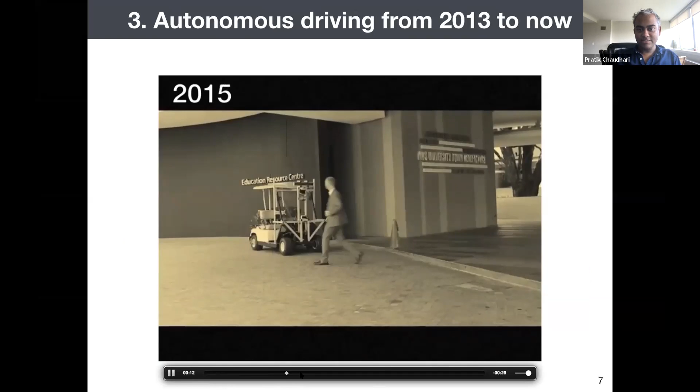The third part of our work is on autonomous driving, and this really began a long time ago, around 2012, 2013, where we were building very rudimentary autonomous cars, which kind of graduated towards full-scale citywide driving. Today, this is a large company called nuTonomy, and it can drive in Vegas quite well, and also Singapore and Boston.

Here is one fun problem that we solved recently in the area of driving. What we're interested in understanding is, let's say I give you one of these cars, let's call it the ego, it's you driving as an autonomous agent, and you're driving in an area with lots of other cars around you. What you would like to do is be aggressive, but not too aggressive, be docile, but not too docile. Essentially, manipulate the cars around you in order to make progress. This is something that human drivers do very well. We would like to build such qualities in autonomous agents.

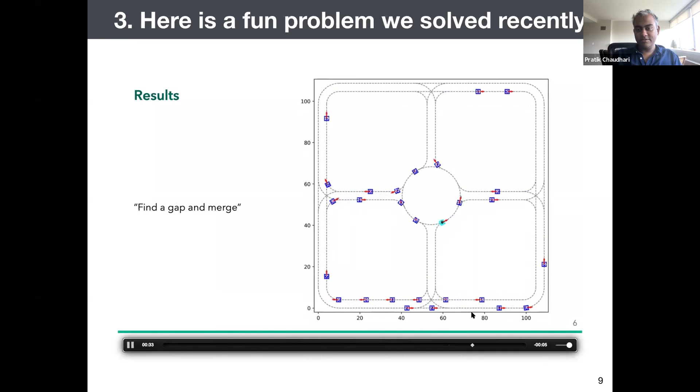And here is how it looks. Watch the cyan car. If there is a car incoming on the lane, it stops. Then if the other car stops, it takes the initiative at this point and goes into the traffic. At the same time, watch it again now. It is trying to merge into a roundabout, and it immediately grabs the initiative. So it's a little bit more aggressive than the other cars around it. That makes progress possible. We would like to study these kinds of strategies, which is what we've done in a recent paper.

So we think of intelligence not just as a machine learning algorithm that classifies your images lying on your hard disk, but we really think of intelligence as a robot with sensors and actuators, and learning lying in between, that helps it go around the world.

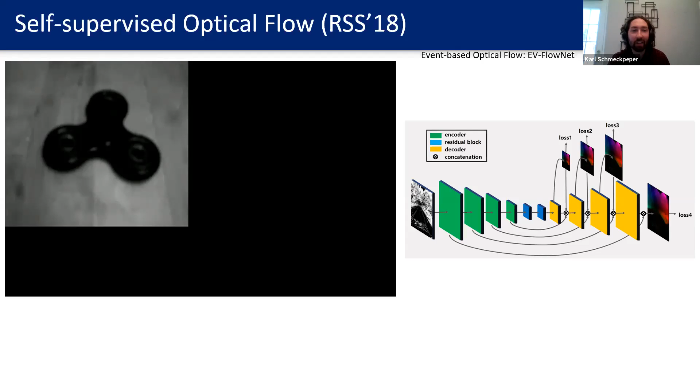We also do a lot of work with geometry. One of the main things we're looking at is equivariance and invariance. Convolutional networks work very nicely because if you translate an image 5 pixels to the side, they respond the same way. But if you rotate the image by 5, 10 degrees, whatever, suddenly the response of the network is completely different. So how do we make it so the networks can handle rotations and handle translations and handle all the different transformations that people can intuitively understand and are important for interacting with the world. We've done a lot of work with spherical harmonics and other geometry to make it so you can get representations that work well from various angles.

And this allows for pose estimation by having these equivariant embeddings, just by comparing the differences between two embeddings. Also, geometry allows us to do a good deal of stuff with pose estimation. Initially, we did this with a lot of objects, and that allows us to pick stuff up.

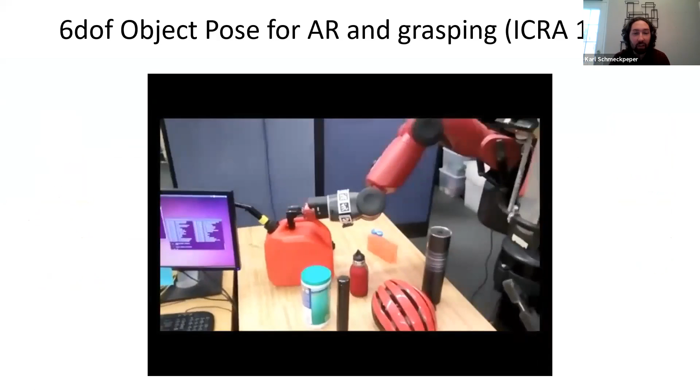We've since extended this to outdoor systems, more unstructured environments. We've also applied a lot of the work that came from doing objects to working with people, which is much more complicated as people are deformable and have different shapes. So we do a lot of work with human pose tracking, human shape estimation, and applying many of the same lessons we learned about geometry to these tasks.

And we're looking at multiple humans. I definitely don't have time for this video, but we can estimate positions of multiple people using deep learning and all sorts of other stuff.

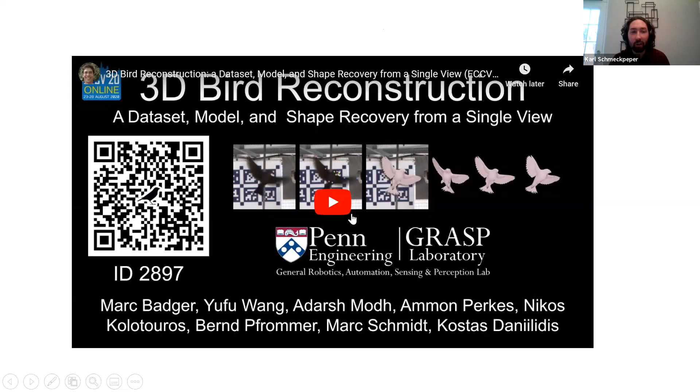Another project we have relating to this is doing the same things with birds. We have a collaboration with a bunch of people in biology where we're tracking a large number of birds and doing pose shape estimation to try to learn about their social behavior.

Next we get into our studies of actions. For a lot of predictive models, reinforcement learning, we're interested in building up good understandings of the world. But how exactly you gather the information for that is non-trivial. So we do a lot of work with figuring out what is a good exploration policy, how do you make it so a robot can actually be curious and go out and explore the world, try things it doesn't know about, and improve its understanding of the world, so it can learn quickly and efficiently in task-agnostic ways, so it can learn to do a lot of stuff.

We also do work with learning without actions. So if you have a large amount of, say, video, and you want an agent to be able to do behaviors in the video or learn useful information from the video, we have work with taking videos of humans doing various actions, sweeping, moving objects around, and making it so robots can learn about the environment or how to see things or how to complete those actions by looking at videos of humans, despite the human videos not having actions, having a lot of domain shift, and basically enabling reinforcement learning, video prediction, and that kind of stuff.

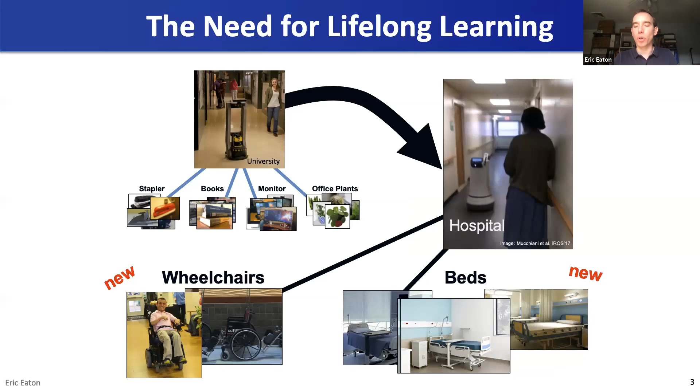Now transfer learning enables the robot to build upon its previous knowledge. But what happens if we extend this out to even more objects? Or what if we take the robot and move it to another setting, like a hospital, where now it encounters things like wheelchairs and beds and other objects it has not encountered before? And then we move it to another environment, like a museum, and then another and another. The idea is that lifelong learning enables the agent to just continually build upon its knowledge over time.

So the goal of the work in my group is to develop intelligent systems that can first off quickly learn new tasks by building upon their previous experience. As they experience the world, continually improve their models. We're not interested in robots that just learn one thing and do it well. We're interested in robots that learn a whole variety of different tasks and do all of them well. And just like you or I, we contend that robots can do this with interaction with other agents as well as humans by, for example, learning from demonstration.

And all of this is built around this idea of lifelong learning, where we have an agent deployed for an extended period of time in the world. So we built a whole family of lifelong learning algorithms around this idea. It started back in 2013 with our first algorithm called ELLA, which worked on classification and regression, and we've since extended it out in many different ways.

We've looked at curriculum selection, where you give the agent some control over its environment. We looked at reinforcement learning in lifelong learning settings. We also looked at how do you learn by imitation from humans, where you have a large variety of things that you need to learn from demonstration over time. We looked at how to do autonomous cross-domain transfer, how to do zero-shot learning, giving a description of the task or environment you're trying to solve, how to do this in distributed settings with cooperative lifelong learning, and also in deep learning settings.

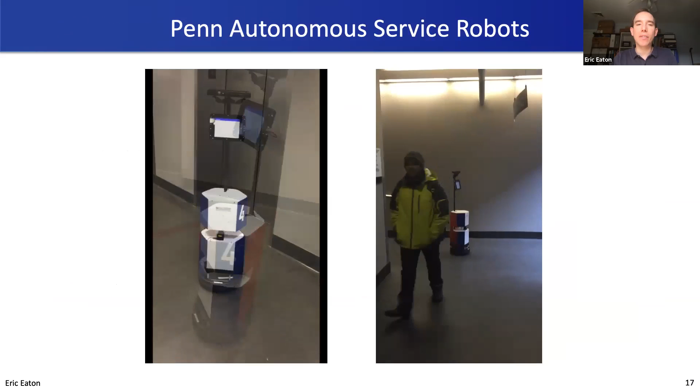Here's a quick example of some videos on autonomous service robots. You can see more if you go to my website, but these are robots we have, which when we're available, allowed to go around the building, we have them running around the building, and we can run experiments in practice.

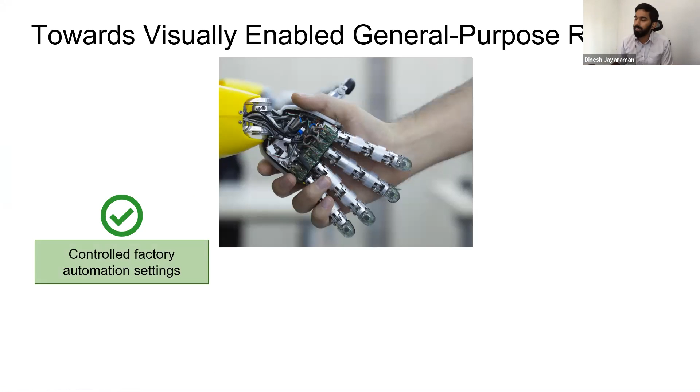All right. Hello, everyone. I'm Dinesh, and I lead the Perception Action Learning Research Group here at GRASP. Like a lot of us, we are interested in building general purpose, autonomous, versatile robots. But if we take stock of where robotics is at today, we notice that a lot of the successes in real world applications have come primarily in controlled factory automation settings. And we've had relatively limited success in delivering on the promise of robots being helpful assistants in our homes, offices, and more broadly in our everyday lives, right?

And so if you look at the differences between these two settings, one thing that stands out is that on the left, you typically have fully observed settings with fully modeled dynamics, whereas on the right, you typically have many more unknowns and uncertainties.

I believe that what's necessary to make the transition from the left to the right is perception, because perception entails extracting information and therefore resolving uncertainty. A lot of the work we do in our group is built on the idea that high bandwidth perception, which delivers a lot of information per unit time, such as through vision, is key to solving many of the remaining big problems in robotics.

So we treat action in our research as both a means to perception and an end for perception. That's a useful organizing principle for many of the projects in our group. I'll talk about a couple of these to highlight two broad umbrellas: one under the perception-helping-action arrow, and the other under the action-helping-perception arrow.

For perception helping action, the thing I'll highlight today is visual dynamics models, where we try to model the evolution of the visual state of a system. Because this is such a difficult problem, since you're operating in high dimensional spaces, the angle we've taken is to build some kind of abstraction that reduces this problem to be more tractable and to help deal with problems like accumulating errors over time.

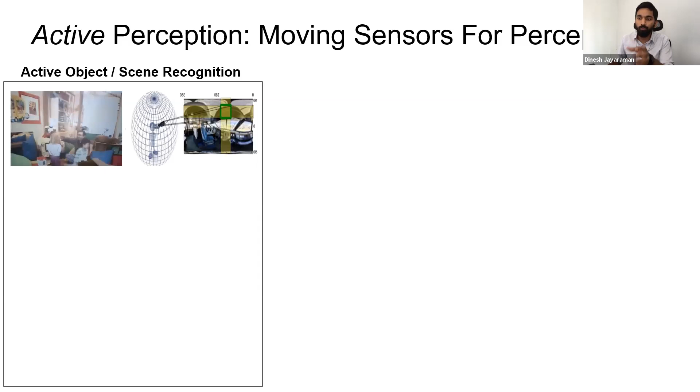Here is an example of object or scene recognition with active perception, wherein the idea is that you can move your robot, or manipulate an object, for example, to get to a more informative view.

We've done this both for object recognition, where over the course of manipulation, you're able to get from a poorly lit oblique view of an object to a better lit, more frontal view, and then recognize its category better.

We've done similar things in the scene recognition setting, where the agent scans its camera around a virtual scene and then identifies which category that scene belongs to.

We've used similar principles in the tactile manipulation setting, where the tactile sensors are actively moved around an object to identify which points of contact correspond to stable grasps. Once you've identified a good stable grasp, that's when you lift it off.

I'll let that video play in the background and move to another application where we've done similar things, which is reconstruction. We can train policies through the objective of reconstruction that sample important views in the scene that matter for reconstructing the entire scene.

We've shown that those same policies, trained with this unsupervised reconstruction objective, can transfer to a number of downstream tasks. There's also a fun application of that. I'll move on to my final slide now.

Generally, the organizing principle for many of these projects is that perception can aid action, and action in turn can aid perception. These are a number of other projects that I haven't mentioned.

Here's a snapshot from a couple of months ago of some of the students working in our lab.

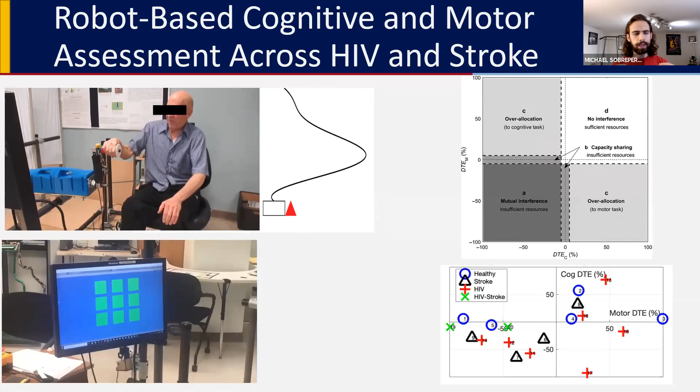He's doing this within the context of looking at the interplay between HIV and stroke. We know HIV is a predictor of stroke—if you have HIV, you're much more likely to have a stroke at a young age. So he's trying to understand how you deliver therapy to those communities and handle that challenge.

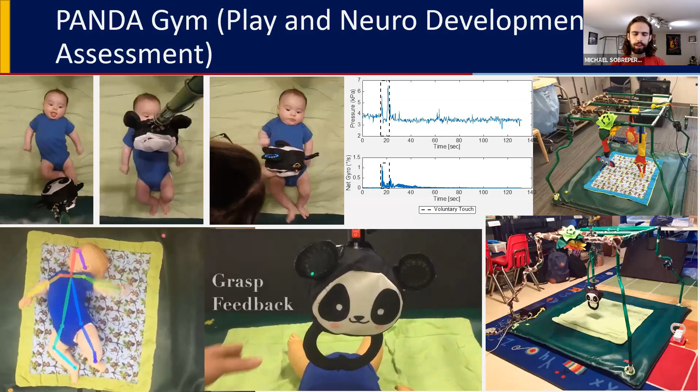Another project we're working on is the Panda Gym, which is trying to deliver assessment tools to children at a very young age. If a child has any sort of delay in their development, if you can find that early on, you can deliver therapy at a young age. And because of the neuroplasticity present in young children, you can start to deliver really positive outcomes long term. The thing is that there are a few assessments for young children, but they're really expensive. They require really expert clinicians to be able to perform, and so they're not really accessible, and as a result, they're not as broadly used as one might like.

So could you instead present children with some stimulus in the form of this toy that has various sensors, can make noise, can light up, or perhaps just observe them directly using the same pose tracking that everybody else uses, use pressure mats, etc., to try to get at what are the things that can tell you that a child is developing in an abnormal way.

And so this project is actually scaling up rapidly. We've tested around 30 subjects so far, but now we're about to test like 1,500 subjects in ICUs, and another 150 in a newer version of this gym. And that's being done underneath an R01 that Dr. Johnson won with some other collaborators at Penn.

The project that I work on is the Flo and Lil' Flo robots. The idea here is that we're all doing this telepresence thing right now, and although it works for this sort of thing, it doesn't really work that well for rehab, because the ability to motivate people over this, the ability to communicate with them over this is somewhat limited. And then looking across it, my ability to assess anybody else's motor function over this is somewhat limited as well.

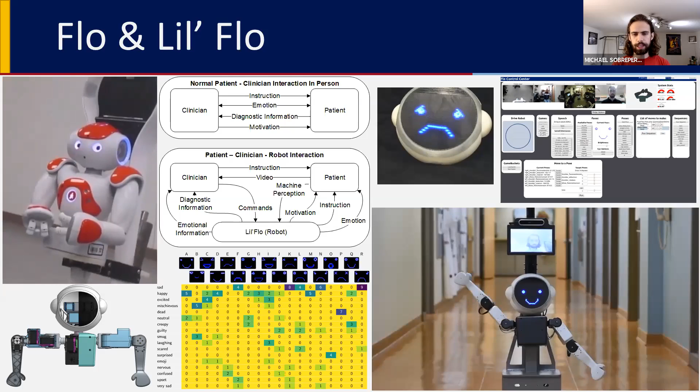So what if we were to take social robots, put them onto these mobile telepresence platforms that are already used, and use that social robot as a way to engage patients. So play games with them, demonstrate activities to them, help to build that motivation, build that understanding, and then use computer vision and machine learning and all that sort of stuff to come back and do an objective assessment of what the patient's function is. We're in the process of doing both feasibility testing on this and testing the effect of that social robot.

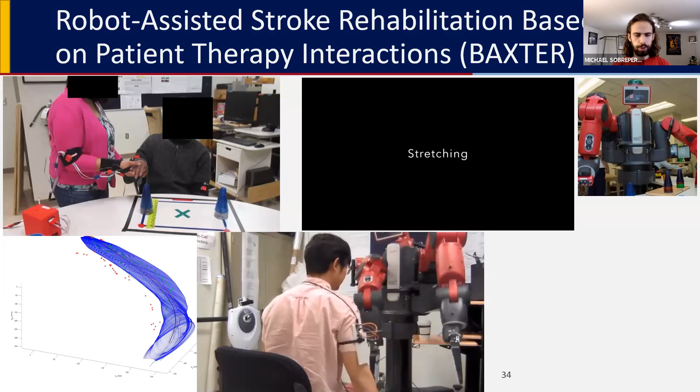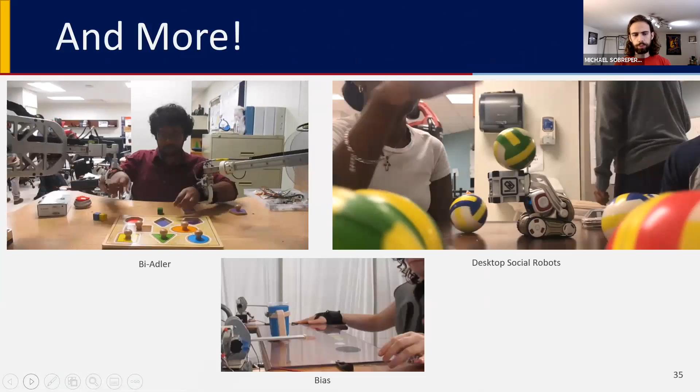We've also done some hands-on work where we've got robots actually manipulating people as they move to try to push them towards more ideal motion parameters. This was done using a Baxter. And then a number of other projects looking at how we can do bimanual rehab, how we can do really high speed kinematic tracking of arms to do assessment, etc.

So here's some contacts. If you want to reach out, I'd be happy to talk to you, as with the other members of the lab. Thanks.

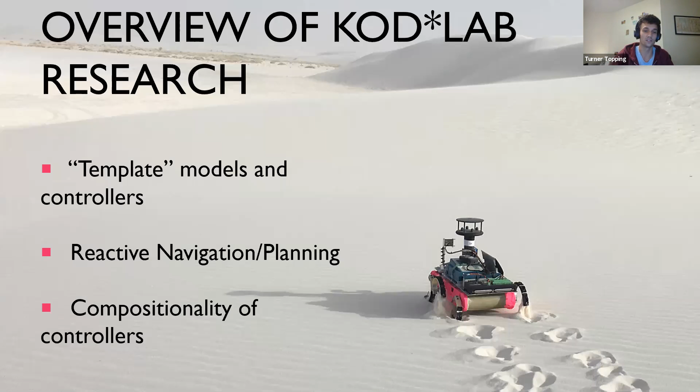So what do we do in Dan's lab, in Kod Lab? We focus on a lot of different areas of research, but I'm going to talk about three main thrusts here today. The first one is template models and their controllers. The second is this idea of reactive navigation, reactive planning. And then this last one is going to be the compositionality of controllers primarily.

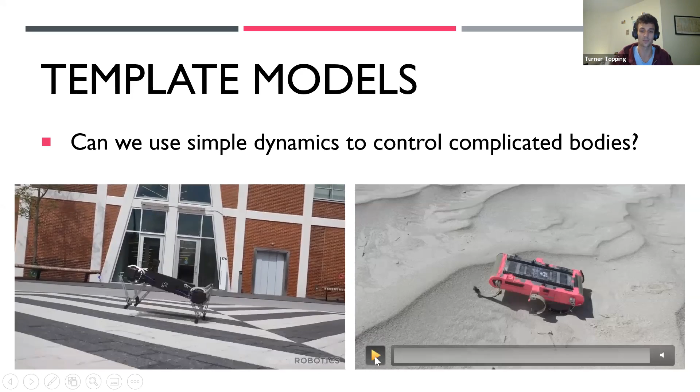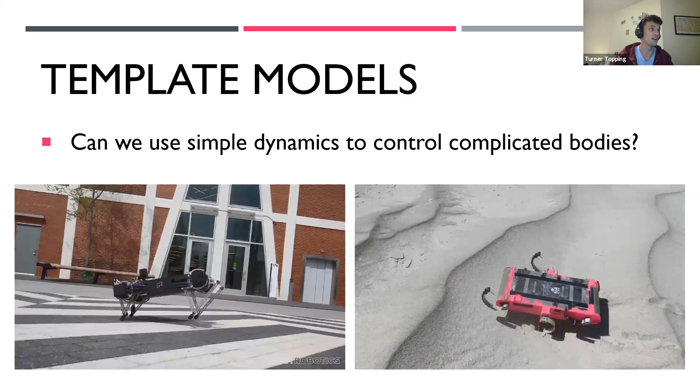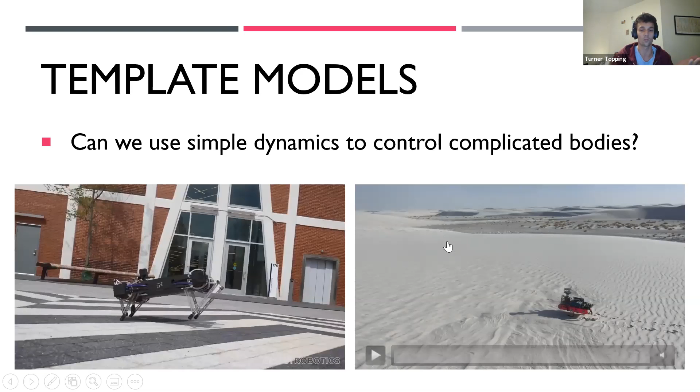So what are template models? If you remember from your ODE classes what a spring mass damper system is, we basically like to think about complicated systems as behaving like simple systems. Here are two robots: the one on the left is Minotaur, the one on the right is RHex, and they look very different morphologically, but they both are operating under the same principle, where their legs are pretending to be these spring mass damper systems. Because of that, we can transfer what we learn about one system and how it behaves, and how to write behaviors for it, from one to the other within our ability to anchor these systems to those spring mass damper kinds of things.

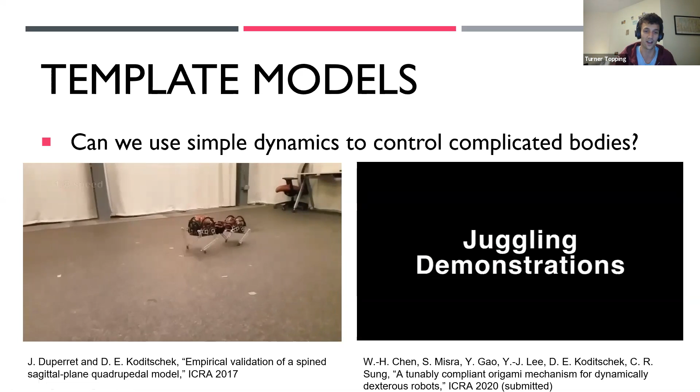And as the systems get more complex, we can do the same kind of thing. So here's a student, Jeff—he's graduated now—his robot Inu, which now has a spine that's flexible, and it's actually being driven actively to lengthen the stride and generate more energy to run faster and jump higher.

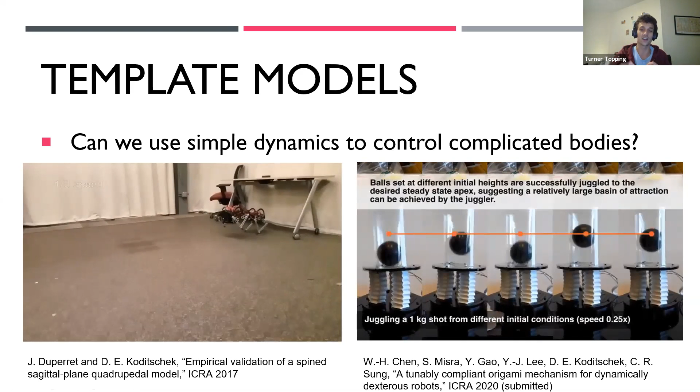Here's some work by student Wei-Hsi Chen, experimenting with these origami structures. They have a very high degree of freedom, so they're very hard to control in general. Instead, we're trying to anchor them down to these simple one-dimensional degree of freedom systems. He's able to juggle this 1 kilogram shot to different heights with this very high degree of freedom system.

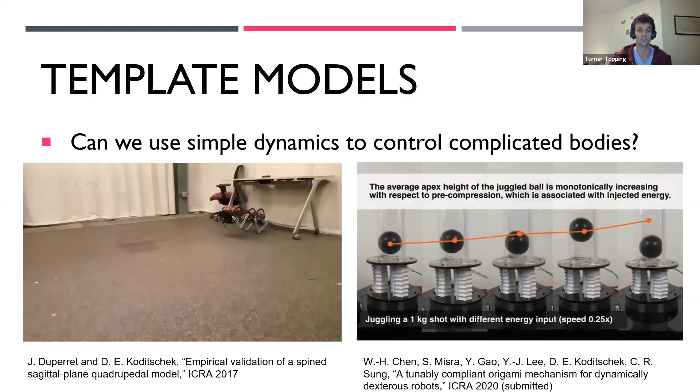We also like to model our environment. One of our students, Sonia Roberts, is working on how to model sand. Sand is notoriously hard for legged robots to navigate because it's so inconsistent and has this strange behavior, making it a very complex interaction. Sonia is trying to come up with a model for sand that looks something like the spring mass damper system we know so much about. When we think about the robot's leg interacting with the environment, we can think about that as the phasing or interaction of these two controllers.

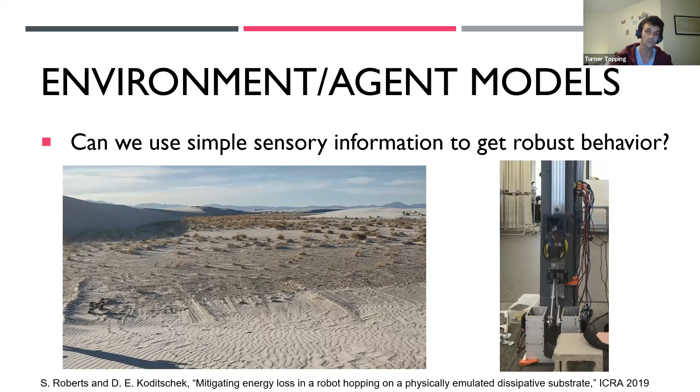Another thing we like to think about is navigation. You've seen a lot of different strategies for navigating the environment. Typically what we do is get an assessment of everything around us, decide what we'd like to do, and then solve it in some sort of AI or machine learning way. If something unexpected comes up, we stop and plan again. But sometimes that's computationally expensive, so wouldn't it be better if we could react to things on the fly?

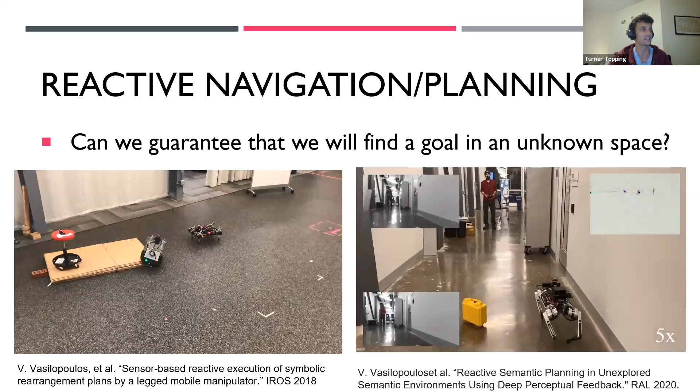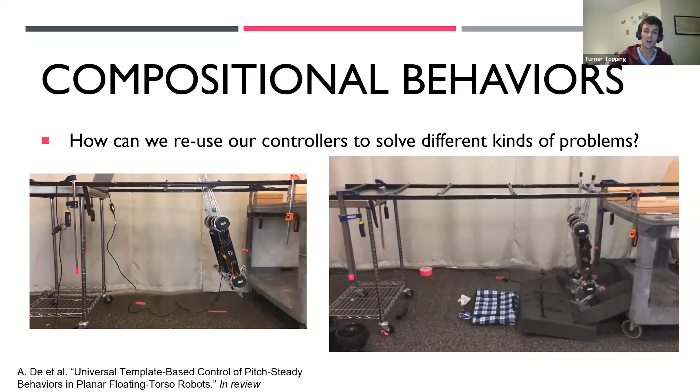You can reuse these template behaviors we talked about at the beginning, and if you're able to parameterize them, you can understand how one segment will end and where the next needs to begin. If you can talk about the guarantees, the conditions under which one piece needs to start and under what conditions it will end, you can talk about stringing these things together in something called sequential composition, which is not a new concept at all, but we're trying to expand it into these more dynamic regimes. So, in the hopes of keeping things quick, that's basically all I have to say.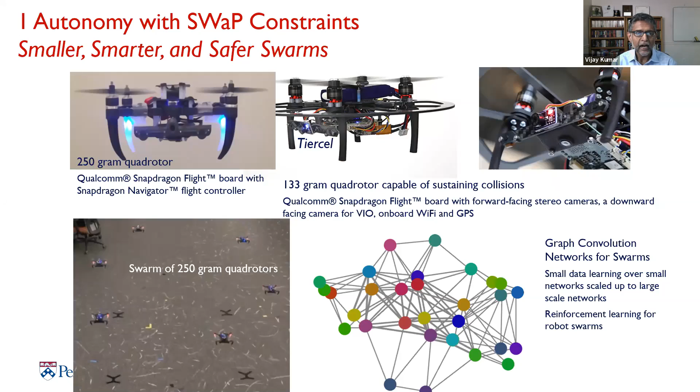Recently, there's been a big project awarded to the school led by my colleague, Cherie Kagan, which is really about bringing these technologies to precision agriculture, where the idea is that our robots can act as our eyes and ears and noses, essentially sniffing out information about plants and trees, and be able to customize the kinds of things you might do on a farm to the specific plant - water the plant, fertilize the plant, apply insecticides, and so on.

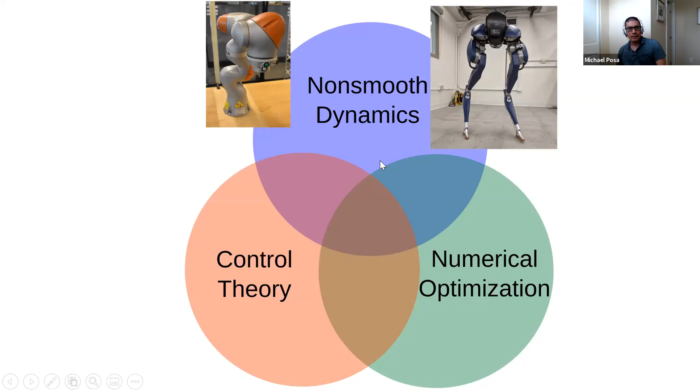So I'll give a couple of current projects going on in the lab. One thing we've been thinking about lately - this is Yu Ming's work in our group - is the role of simple models for planning and control, in this case for locomotion. A pretty common technique that many people use is to essentially control their very complicated robot by making it act like a very simple thing. In this case, you might take your 30-degree-of-freedom walking robot and say, really just make this act like a pendulum, make it act like a point mass.

And by doing so, you can gain the ability to act in real time, to make high-speed decisions, and ultimately some really beautiful physical insight has gone into these realizations that, at the end of the day, these complicated systems do look a lot like pendulums, or do look a lot like point masses.

The question we've been asking, though, is once you do that, once you make this reduction, you've given away a lot of your control authority, you've given away a lot of your ability to perform more complex behaviors. So how do we start adding in that complexity back into the system? How do we start adding piecemeal in degrees of freedom to the system? And can we do so in a way that maximizes our potential moving forward?

So this is, again, Yu Ming's work, looking at formulating an optimization problem where you're explicitly trying to find a simple representation of legged locomotion that you can use for real-time control and planning, but is more capable than, say, a simple point mass might be.

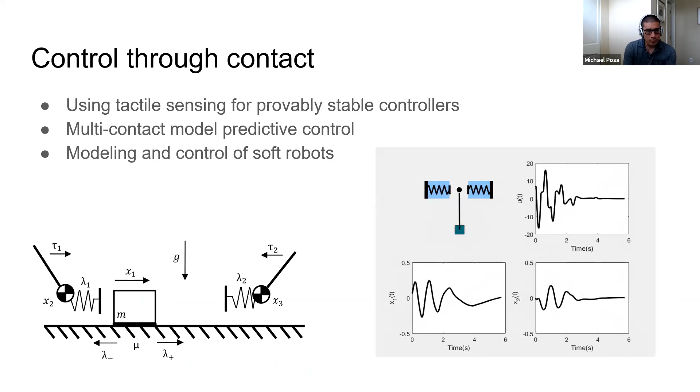Another recent project I'll mention is control through contact. This is work by Alp Aydinoglu in our group. We're interested in designing control policies that are going to be robust in settings where the robot must make and break contact with the environment.

One particular thing we'd like to leverage here is the role of tactile sensing. For cases where you may not be able to observe the object you're trying to manipulate, but you do have tactile sensing available, can you still design control policies that are robust or stable?

Alp was using bilinear matrix inequalities to generate provably stable control policies for these multi-contact systems. We're hoping to take this into the future with a joint project with Marc Miskin and James Pikul, as well as others outside of Penn, for a soft robotics project, extending these techniques for control through contact into the challenging domain of very high-dimensional soft robots. And with that, I'll wrap up and show a picture of our lab.

This is our lab group over the summer. Everyone very, very far away and remote, but we still had a good time this summer.

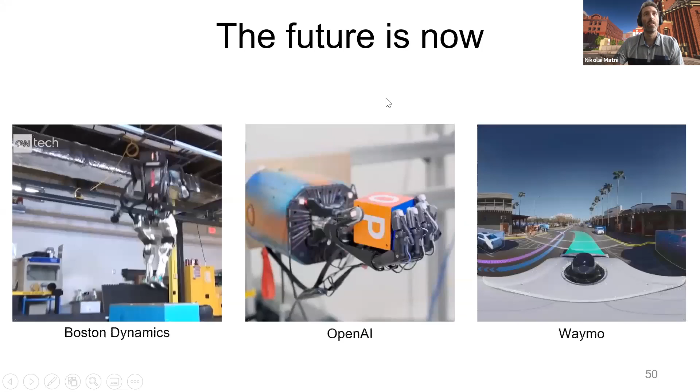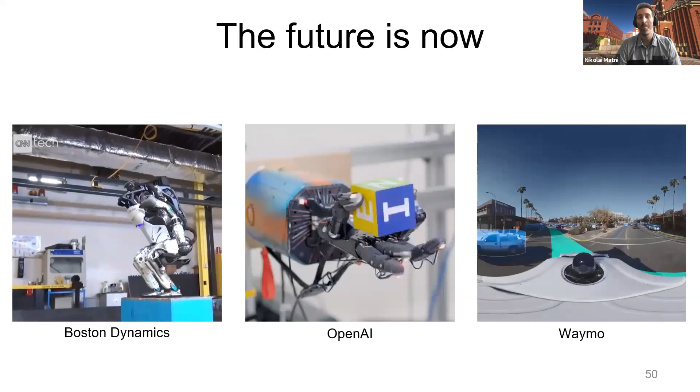If you watch some of these videos online today, you might be tempted to say something a little corny, like the future is now, and things like robotics and AI are solved. These are all very impressive, but if you dig a little deeper, you see pretty quickly there's still a lot of work left to do, especially when it comes to endowing these systems with guarantees of robustness and safety. That's broadly what my research is about, trying to get learning-enabled systems to reliably not fall over or crash into people.

Our group's broad approach to achieving this is to combine tools from dynamics and control, and the guarantees of robustness, stability, and reliability they typically provide, with the benefits of machine learning and big data, such as high performance, adaptability, and optimality. Our hypothesis is that it's at their intersection that all of our nerdy hopes and dreams are going to come true. So our work broadly works on problems at the intersection of these two fields, ranging from core theory and applied problems and everything in between.

What I like to spend the rest of my time doing is highlighting how we've applied this philosophy to one particular problem area, namely understanding perception-based control and how the interaction of machine learning and control manifests itself in this area. We do work on a whole bunch of other stuff in our group, and I'll have some pointers to other papers on the last slide, but I recommend you check out our website for more information.

In this broad space, one of the directions we're looking at is asking what kind of guarantees, if any, we can provide for control systems that get information about the world using cameras or sensors.

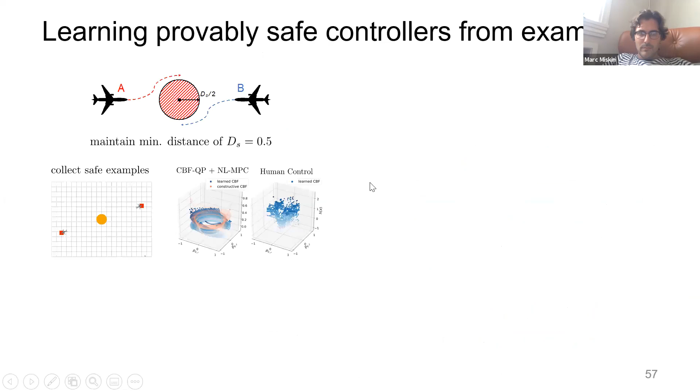Oh sorry, those were backup slides that weren't supposed to make it. Yeah, I was like, I can't talk about that. I don't know what that is.

The way we build them, our lab breaks down into 3 main buckets. Part of what we do is build components for robots sub 1 millimeter in size—lots of nanofabrication and developing new nanotechnologies, building small sensors, computers, and actuators. The second is putting those components together to make individual robots, which requires thinking carefully about classic robot problems in new ways at this ultra tiny length scale—how robots should locomote, how they should work together, and applications. The third is swarms of these things: once you have robots, you can make millions of them. How do they interact to do useful things? Can we make materials out of them? Can we have them interact with biological systems? So we look at these as collectives and the emergent behaviors that come out of them.

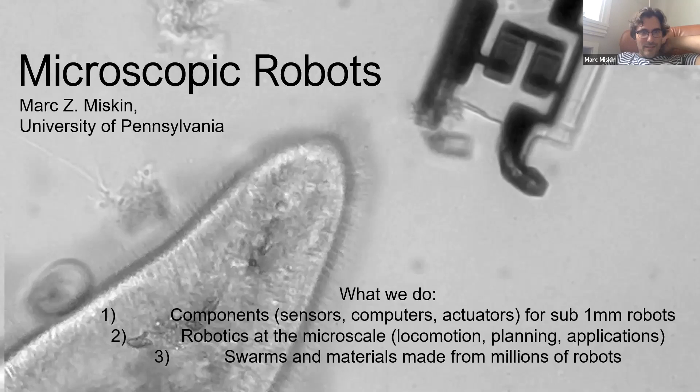So let me show you some... I should be able to advance the slides. Okay cool, so let me show you one of these little guys in action.

This is our very simple robot, but it gives you a gist of what we do. The robot breaks down into 2 main parts: it has a body, and inside the body are standard silicon microelectronics, connected to electronically controllable actuators that form its arms and legs. This robot has a really simple design, just a series of solar cells on it, and by shooting laser light into the solar cells we can trigger the actuators to move. You can see this little laser dot hopping back and forth—that's me firing laser light to drive the actuators—and off goes this robot marching around the microscopic world. One cool thing about this movie is if you look around the robot you can see little dust jiggling around—that's Brownian motion.

So this robot is so small that if you made it just a factor of 10 to 100 times smaller, it would begin to diffuse around due to collisions from the water molecules surrounding it. So again, it just gives you a sense of how small this little tiny device is.

Now, one of the cool things about this robot, besides the fact that it's really tiny, is that we make these things using essentially the toolkit developed by the microelectronics industry. And one of the consequences of doing that is that we can build these devices massively at scale.

So this is a movie showing the last stages of our fabrication process. What we're doing is etching out the substrate, the foundation underneath the robots, to release them into their final geometry. This movie is real time, so this is actually the time scale at which this takes place. You can see that once that surface underneath the robots dissolves, they fold up into their final target structures.

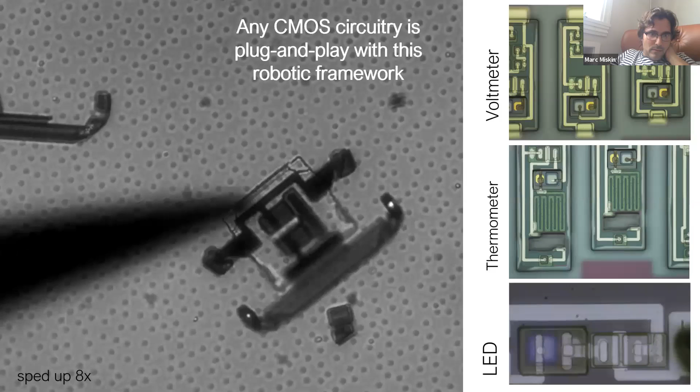So what are we doing now? Well, this is a pretty dumb robot. It doesn't have any real sensors, any real intelligence. In some ways, you could argue it's not really a robot at all.

But what's neat about this little proof of concept device is that all of the systems it uses for powering and locomoting are plug and play with standard silicon microelectronic circuitry. And so what my group is up to now is developing little widgets that you would want to do robotics at this length scale.

So we're building little voltmeters, say, that we can put on this robot so it can sense things in the fluid around it. We're building little thermometers so it can detect temperature gradients or follow them. We're putting little LEDs on the robot so they can blink back to us data about what they learn about the world around them, and we can blink instructions and data back to them by shooting it through optical pulses and light. So this is kind of the vision.

There's a fair amount of technology that we can steal from the microelectronics industry. And we're now in a position to start basically putting legs on those and turning them into systems that move, that actuate, that sense, that do stuff.

So that's the story for our lab. I just wanted to take the last couple seconds to, one, show you one more cool movie of one of these robots running around, and two, tell you about specific projects of what we're actually working on.

So the three big things we're playing with in my lab currently are: first, we have a project about building smart micro-robots, building systems where these devices are actually programmable, where you can write instructions to them and they'll carry out an onboard program. This builds a lot on borrowing technologies from the semiconductor industry.

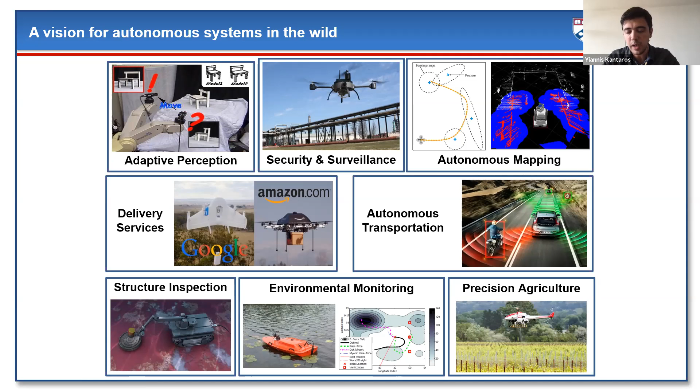Some of the research problems that we're working on in our group range from designing safe autonomous architectures, planning and controlling in unknown environments for robotic systems, to integrating vision, perception, and in general machine learning into the feedback control loop, as well as making learning more robust and verifiable.

There is a deep learning component, and you can think of it as the perception system, the vision system, that interacts with the real world by taking images and then processing them and then generating some classification results, some semantic information about the environment that our system operates in.

And the main question here that we address in our group is to understand how we can compose those three components in a safe, robust, and verifiable way without making the assumption that each one of those components is perfect.

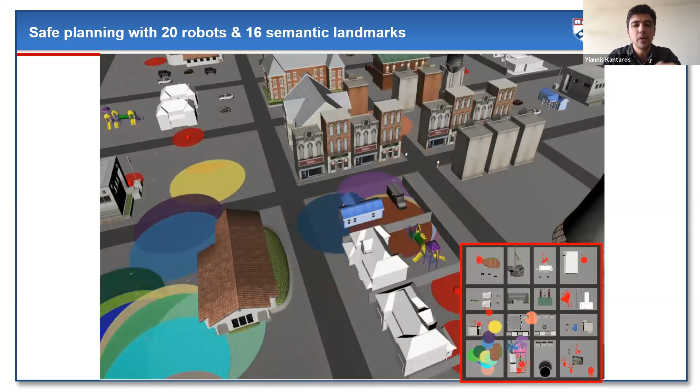We have also released a tool recently, which will be available for download soon, which is now connected to Gazebo and ROS. This is, for example, a simulation video that shows how this whole control loop may work in the real world. What you see here is a team of drones, UAVs, that are flying over an unknown city in order to provide services to semantic targets while avoiding flying over certain residential areas.

And with that, I will conclude the talk, and I will just say that this is a joint work of several talented students and postdocs in our group. If you have any questions, please feel free to reach out to us.

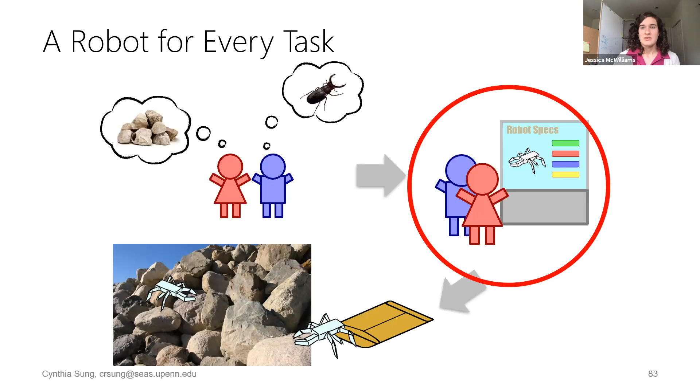Once they are satisfied with the performance of it, then they can get a bag of parts and get... sorry, I'm having some trouble with the slides, but they can get their parts kit and build it.

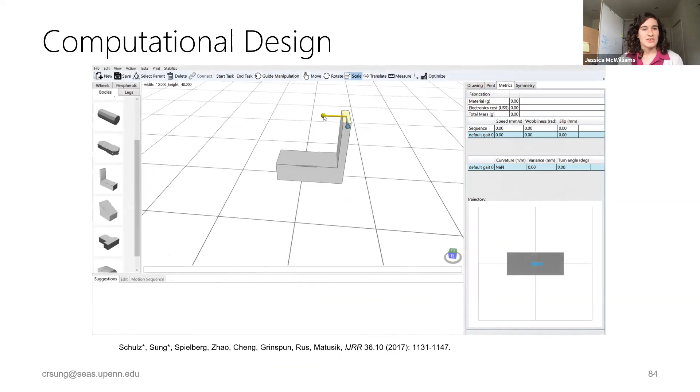So one example of this software is one that Cynthia developed previously called Interactive Robogami. It has in the center a design space where you can drag and drop parts. And then on the left, you have a panel that operates like a construction kit, where you can actually add parts to the robot. You can also add functional parts and customize them to your liking.

The system also gives you gaits where you can operate with motion plans, and it provides metrics and feedback on the gaits so that you know how your robot will perform in real life.

Yeah, so it also outputs a full fabrication plan, giving you STL files that you can 3D print in a matter of hours, as well as electronics, parts that you need, and connections for those parts. So with just a few hand tools and a little bit of extra time, you can easily assemble your robot and have it walking in front of you.

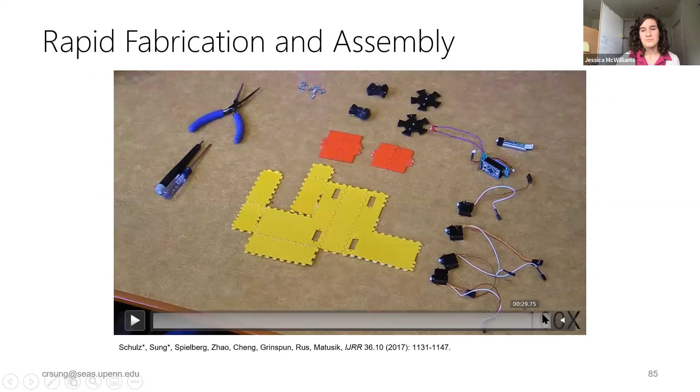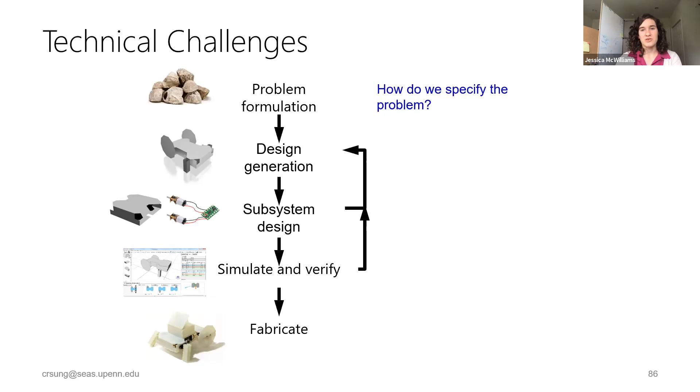We break the design process down into several subsections, and these comprise the technical challenges of our lab. The first one is problem formulation: we need to figure out how we can specify the problem. Next is design generation: what design options should we present the user? Then we go into subsystem design: what subsystems need to be specified, and what are the interdependencies between the subsystems? From there, there's the option to loop back to the design generation phase, as we know that as subsystems interact, sometimes that might make the design infeasible.

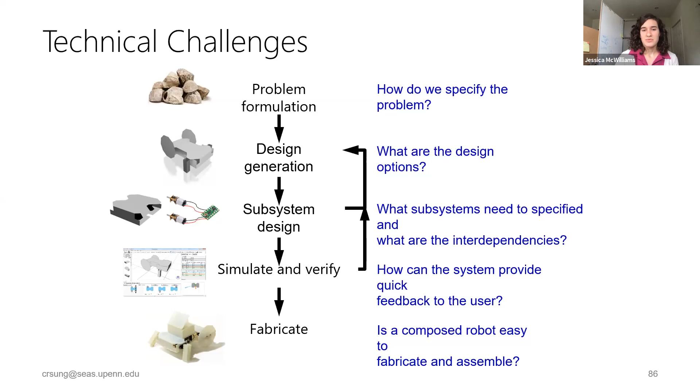Next, we can move to simulation and verification and determine how the system can provide quick feedback for the user. And then finally, fabrication: we can determine whether the robot is easy to fabricate and assemble. We want the user to be able to receive feedback from the system so that they can decide how many times they want to go back to design generation before they decide that they are satisfied with the design and can fabricate.

Next, some projects in our lab. Just to give a brief overview really quickly, we look at foldable robots. These can be made of paper or mylar and can give us a variety of motions.

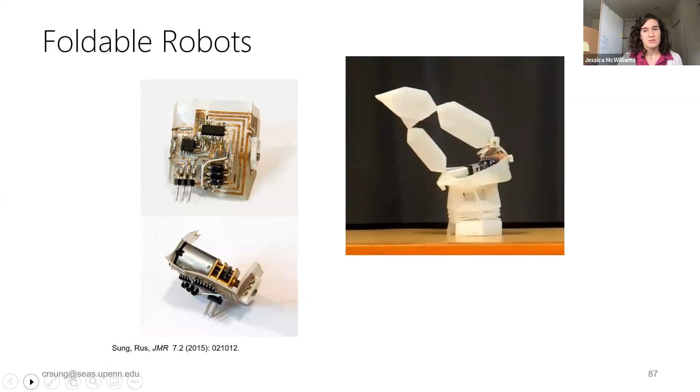We also develop origami mechanics models. We can treat the folds in the origami as springs. And from there, we can determine how the model will behave when you pull different tendons and apply forces at different points on a layer.

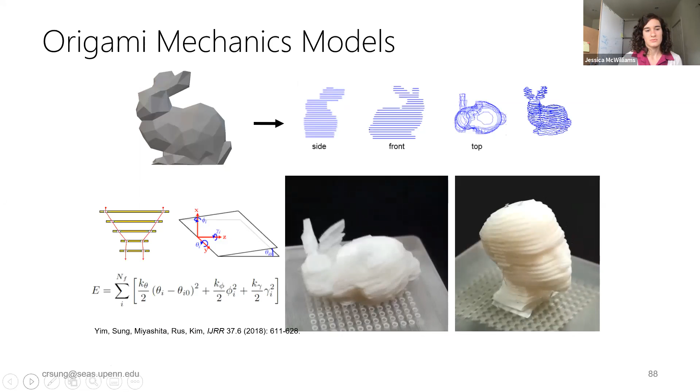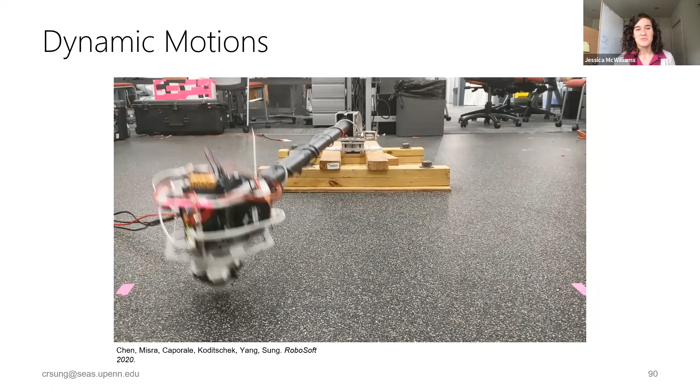Another example of dynamic motions - if you caught Turner's presentation, you're probably thinking this looks pretty similar because it's also in collaboration with Koditschek, and it's basically the juggling robot but turned upside down to exhibit hopping.

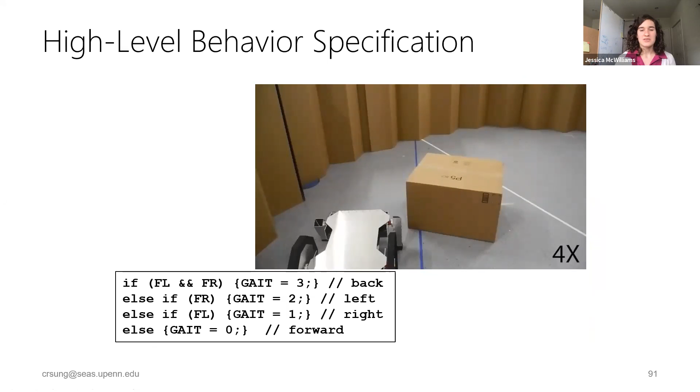We also think about how we can use the gaits that are output by software such as Robogami and put high-level behavior specifications on top of them, allowing users to take the gaits they already have and intuitively design behavior.

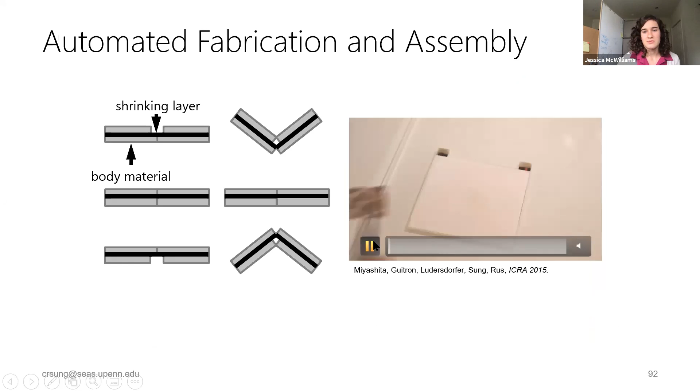Also some self-assembly. Here's an example of a self-folding robot that folds in the presence of heat.

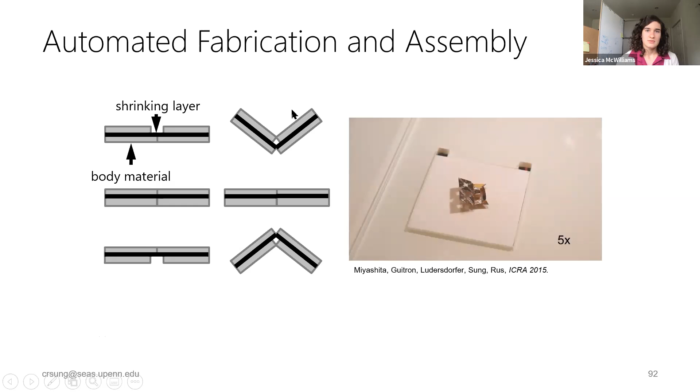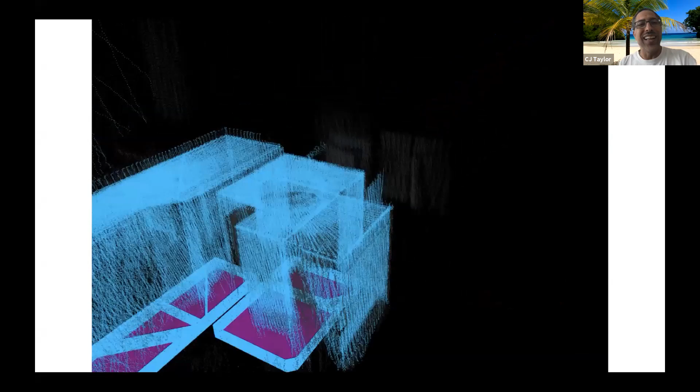So you're seeing an example of that here. This also can be done in 3D. I'm not going to have time to play the entirety of this video, but just wanted to convince you - this is one of a row house somewhere in Philadelphia. It's a 4-story row house, and we're actually able to apply this technique going upstairs, downstairs, in and around, all the while kind of building this room-level representation of what's going on.

Another piece of work we've been doing lately is inspired by our desire to understand the 3D structure of the world. What we've done here is developed a deep learning system - this is the work of Chao Qu. He's developed a system that allows us to look at an image and produce a basis that comprises what we think the depth structure of the scene will be.

The idea of having this basis is it allows us to infer the complete structure of the scene from only a few points. So here on top, we're seeing a situation where we have depth at only a few locations, and on the bottom we have the inferred 3D structure of the complete scene. We do this by exploiting the regularities in this kind of basis formulation.

The other thing we've been able to do more recently is accurately characterize the uncertainty in our estimates. This is a consequence of the way we do things - we can build these Bayesian models and accurately predict places where we have good estimates and places where we have bad estimates. That's very useful for practical applications.

The last thing I want to talk about is a project from another of my students, Anthony Cowley, who recently graduated. This is UpSlam - a system that allows us to build pretty detailed models from LiDAR data. LiDAR mapping is something people do quite a bit, but our take on this problem is that we've built really compact maps of the environment using these unions of panoramic representations. This depth point cloud you're seeing is actually on the order of two orders of magnitude less than what would be required for traditional point cloud-based schemes, but it's just as accurate.

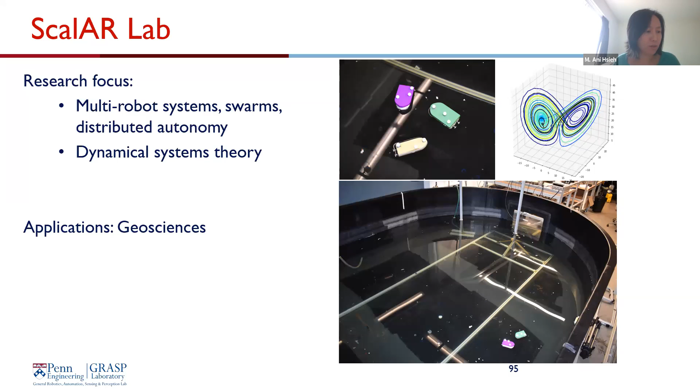Let me see if I can advance my slide. There we go. So this is one example. The idea here is how do we get a team of robots to go out and collect data about a process that is changing across both space and time. This is actually a challenging problem because you have to figure out what's going on about the process - how do you collect the data, where should you be collecting it, and oftentimes, especially with large environments like the ocean, you don't have the amount of sensors needed to cover the large space you want to operate in. So in these cases, you have the problem of how do you work with these limited resources you have - and once you've collected this data, how do you fuse that?

You can hopefully use that representation to reallocate your resources as needed, because the process itself that you're trying to track is changing over time. So some of the questions we think about when we think about these types of problems is what are the correct set of features we should be thinking about when we're trying to model these dynamic spatial temporal processes.

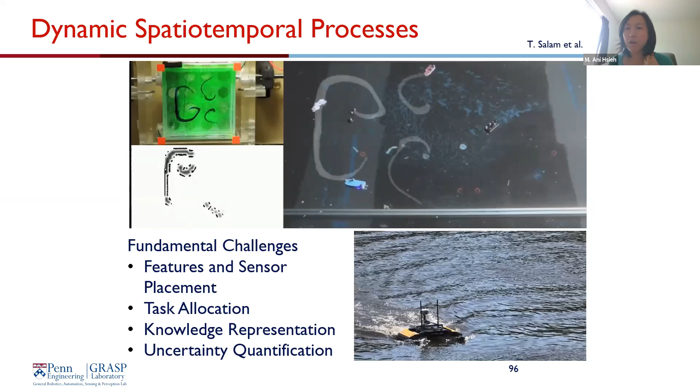So the video you're seeing is basically a dye experiment. You can think about this as a proxy for the distribution or spread and dispersion of some kind of contaminant, like an oil spill in the ocean, or ash clouds in the atmosphere, and how do you get robots to do this?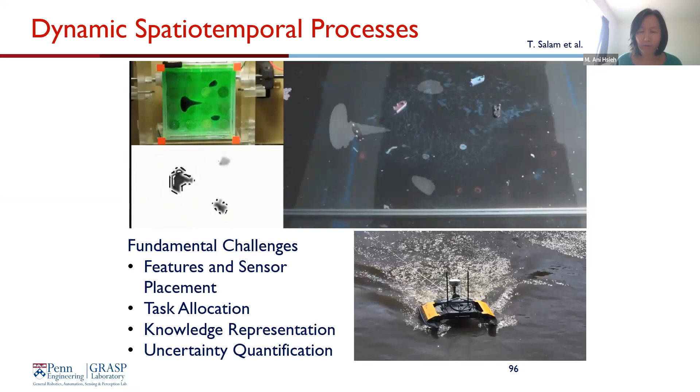We have an autonomous boat that is water-worthy, or Schuylkill-worthy, that can be deployed from behind the Pennovation, assuming once we can get everybody back on campus. So these are some examples of the problems that we're interested in.

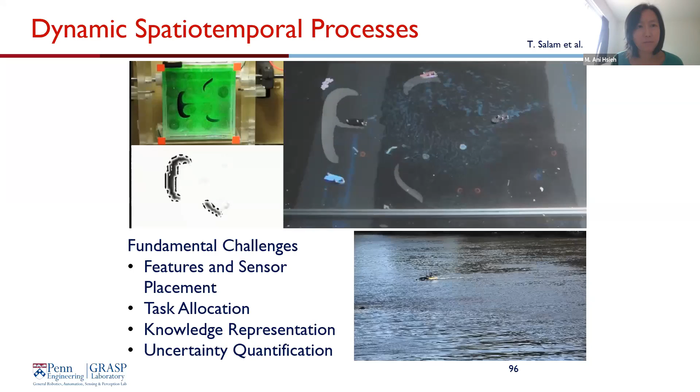Another type of problem we have is, so we're talking about how do we map these kinds of dynamic environments? What are the right set of features? If you have a good representation, how would you be able to do better planning and control for your vehicles operating in these changing environments, where now your vehicle control is also somewhat coupled with the environmental control.

So some examples again are robots operating in the ocean, as well as magnetic micro robots that are actuated by an external field.

So some of the questions we ask - this is an example of a magnetic millimeter-size robot, and we're being really clever about how we exploit the nonlinearities in the magnetic force field in order to drive this from one part of the workspace to the other. So we're really thinking about how do you leverage the environmental dynamics for planning and control, both of single as well as multiple micro robots.

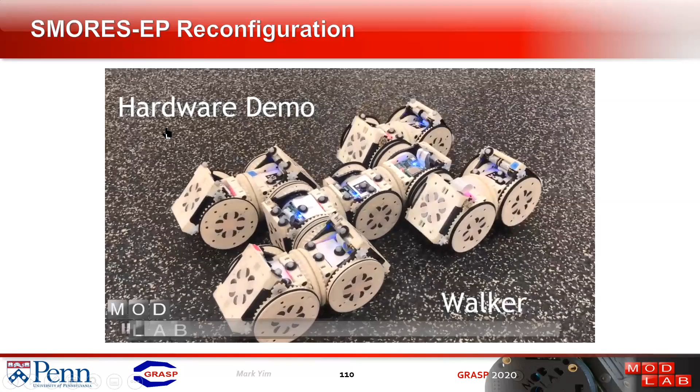So I'm going to give you an update for what we do in my lab. Basically, Mod Lab is built around mostly modular robotics - that's what it stands for. So we've been building robots. Essentially, a modular robot is one that has modules that can rearrange themselves so they can form like a snake, a human shape, a dog, or whatever you like.

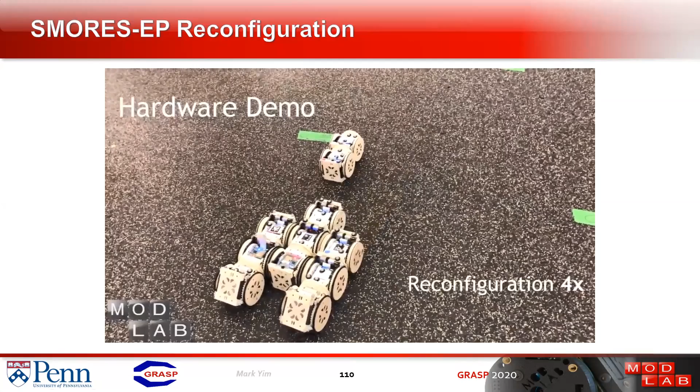There are lots of issues around how you control these systems, how you plan for reconfiguration, and a bunch of mechanical and manufacturing challenges in how you design and build them, especially if you're going to build a lot of them.

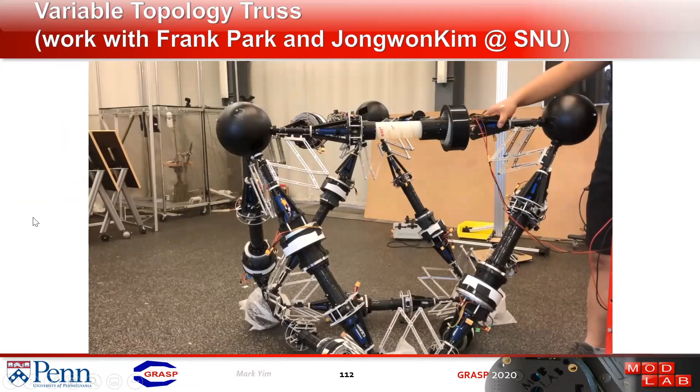This is the latest version of our system, an octahedron. We have what we call a spiral zipper, the element that changes the link lengths. The aluminum linkages you see at each node in the middle are used to reconfigure it, but they don't work that well.

So we're currently working on our second version that will focus more on the reconfiguration aspects.

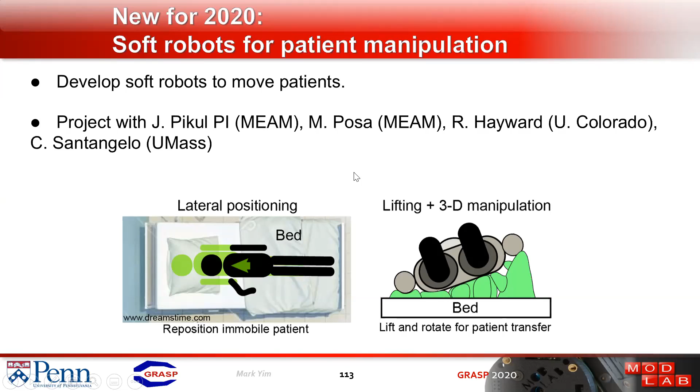New for this year, we're doing a project with Michael Posa—he talked briefly about it—and also James Pikul, who's the PI in mechanical engineering, on soft robots. The main application we're looking at now is patient manipulation: can we move patients around with soft robots? We're working with a nursing professor on that, which is an interesting and difficult problem.

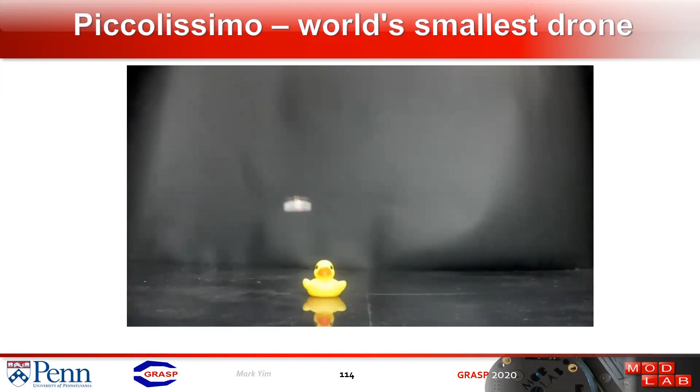Another set of projects we're working on involves flying robots. We have the world's record for the smallest flying vehicle, about 28 millimeters in diameter.

We had a DARPA project to build one even smaller. I can't tell you the exact dimensions, but it's less than 2 centimeters and ultimately less than 2 grams. So we do have that.

We also recently got a new grant to explore swarms of these flying robots—we're going to build 200 of them. The idea is that they'll fly around forming 3-dimensional shapes that a human can interact with.

So how do you make them safe? How do you interact with them? How do you do the control? We'll have local sensing and swarm-based control.

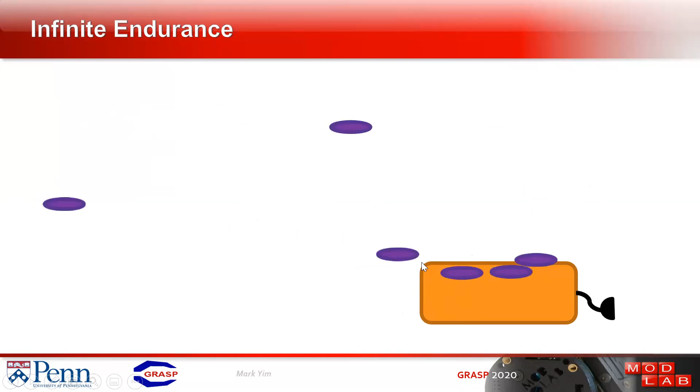One of the main problems with these tiny robots is how long they can fly for, and it's basically not long. So one idea is how to make them fly around longer, focusing on recharging. If we can make them recharge very quickly, we can have essentially infinite endurance—they can fly as long as they like, with a lot of them flying around, forming the shape, and recharging as they go.

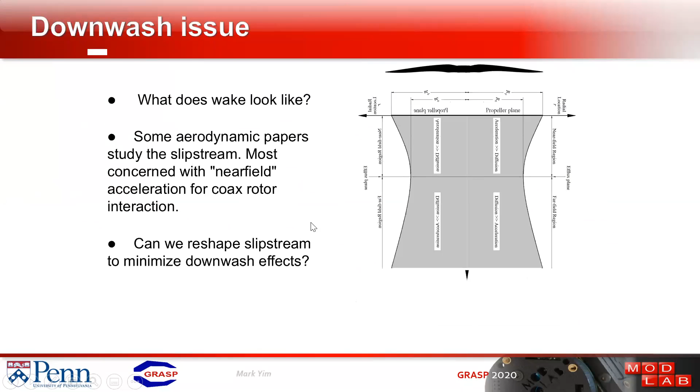Another thing my group is looking at is that when you have a big swarm, the wake or downwash generated by each robot will basically wipe out everyone beneath them, so you have to be careful about that. You can either plan around it, or, as we're looking at, design the propellers in a way that minimizes the wake, which is actually a very difficult problem.

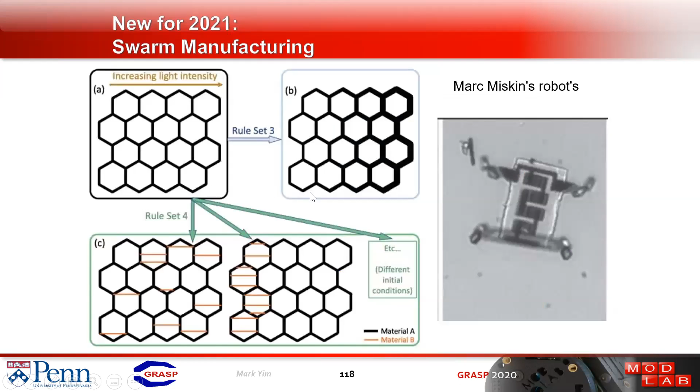The last thing I'd like to talk about is a new project starting, using Marc Miskin's robots—these tiny, microscopic robots. Can we use them in a manufacturing setting? If we have something like a 3D printer and put these robots in there, can they use swarm-based local rules to change the structure as we manufacture it, to give it different properties?

So if we have a 3D printed hexagonal area, maybe with 10,000 of these little robots that can add or remove material, can you make it stiffer or more flexible or whatever property you want, based on the way biology does it with termite mounds, wasp nests, and that kind of thing?

We have about 15 PhD students and another couple dozen masters and undergrads. You can see them on my website, or you can send me an email. Our lab is at Perch.